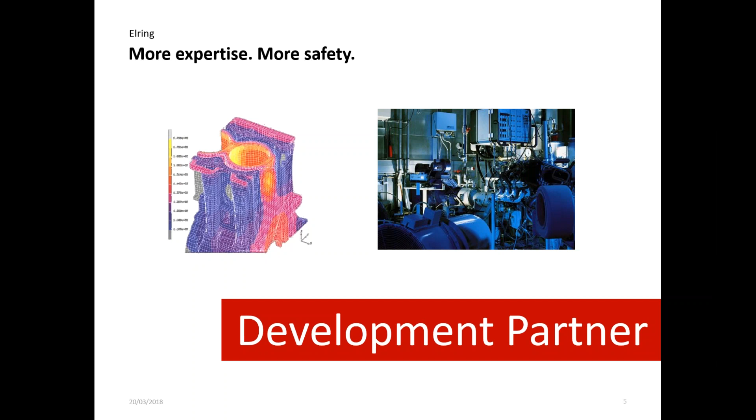Also the Elring gaskets - this is the thing you have to know - Elring is the aftermarket brand of ElringKlinger manufacturing. These Elring gaskets for the aftermarket are engineered and manufactured on the same machines, the same production lines. So this is well-tested quality for the aftermarket business to repair these engines.

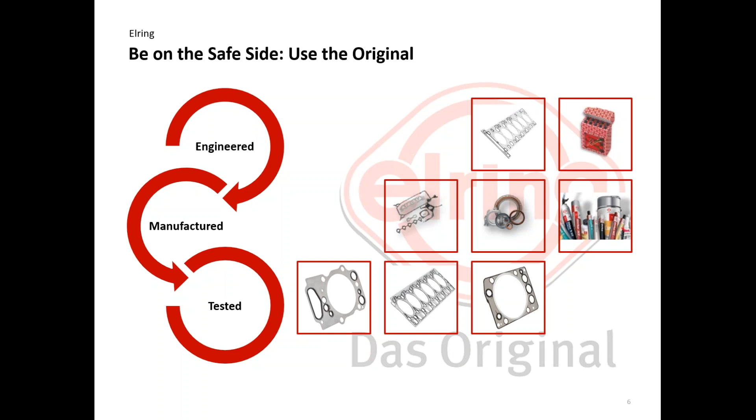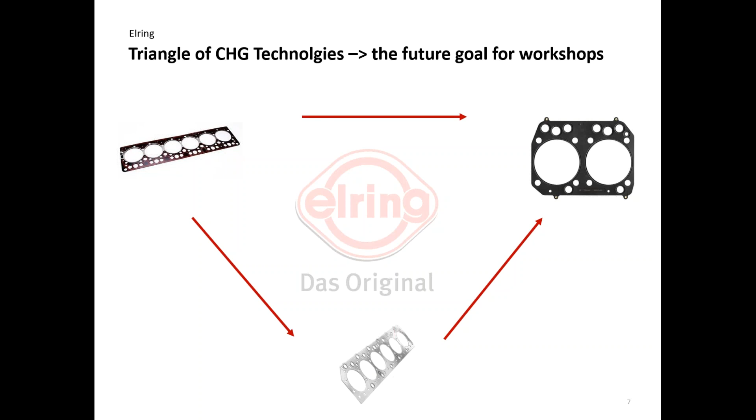These metal gaskets are flexible, no longer static like the old ones. I'll explain why later on. There we have two different technologies, two different ways of function, let's say. On one hand, we have multi-layer steel. On the other hand, we have metal elastomer, which is absolutely different in repairing and in handling. This you have to know. Why is it different? It depends on the surface quality.

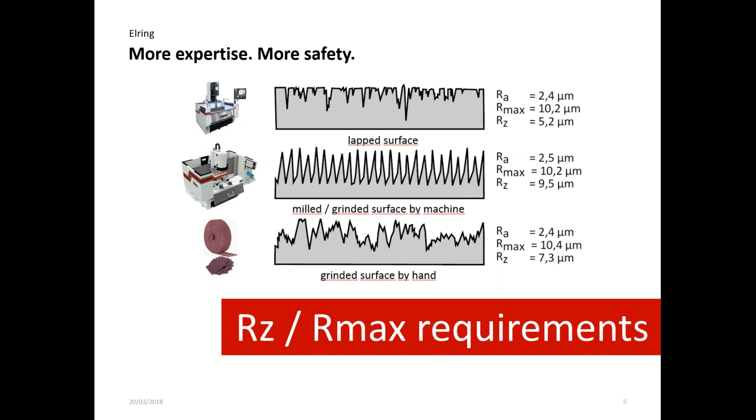Also the quality you have to go for is different from multi-layer steel gaskets to metal elastomer gaskets. This is important to have in mind, because for this you need a lot of experience, a lot of know-how on how to handle the machine, what is the machine speed, how much you can take away in one step. Not too easy to do, but finally you can do it if you have the know-how, and this know-how in terms of cylinder head gaskets, we provide to our customers.

Let's come back to the soft material gasket. This soft material gasket was roughly established in 1950, so this is really old stuff. From the production view, we do not use it any longer, but for the aftermarket, for the repairing, we still need these gaskets. So it's important to have the know-how, to be in contact and in touch with this gasket until today. But for the future business, it's maybe not so important to spend a lot of investigation work, a lot of time, on this old and vintage technology.

Nevertheless, this was a good part to repair, especially old engines, making cheap repairing possible, because of this full contact, full surface contact between crankcase, the opposite parts, cylinder head, and the gasket. So on any space, any area of this gasket material, the surface of the parts will find contact and will match to a proper function.

So this was easy to handle, but it was no longer possible to go any further with this technology because of the increase of high-end combustion pressure. In these times, 1950, we had no turbocharged engines, so the power output was roughly around 150 kilowatts, and the high-end combustion pressure was at 120 bars. Today we have nearly double in both parameters.

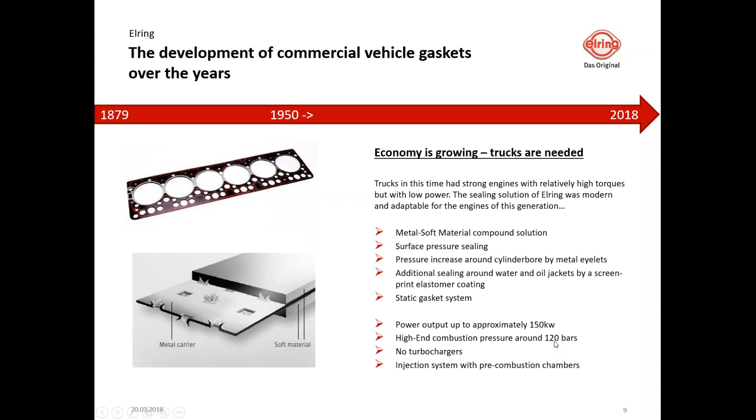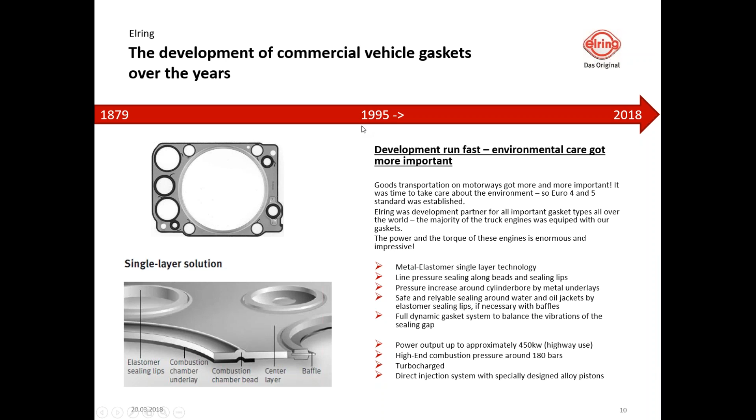But the development goes on and on. Today we have these new engines, also for trucks - doesn't matter whether medium-sized trucks with 4 or 6 cylinders, or these big, real heavy diesel engines. Today we have one cylinder head for these engines, with overhead camshafts, sometimes double overhead camshafts, 4 valves per cylinder, to fulfill today's environmental laws and have clean exhaust gases also on the truck side. For these engines we need a different technology of cylinder head gaskets.

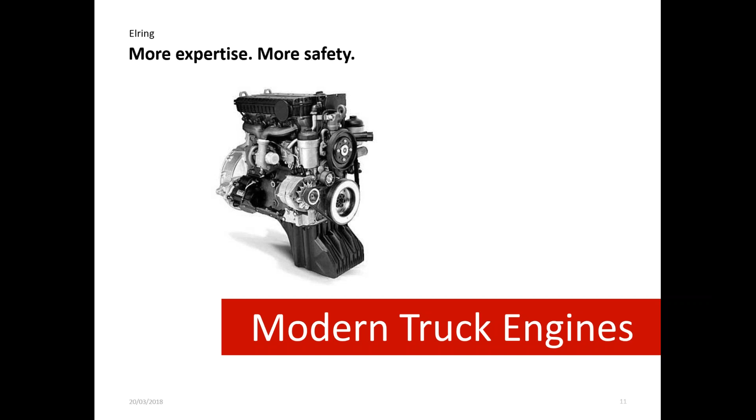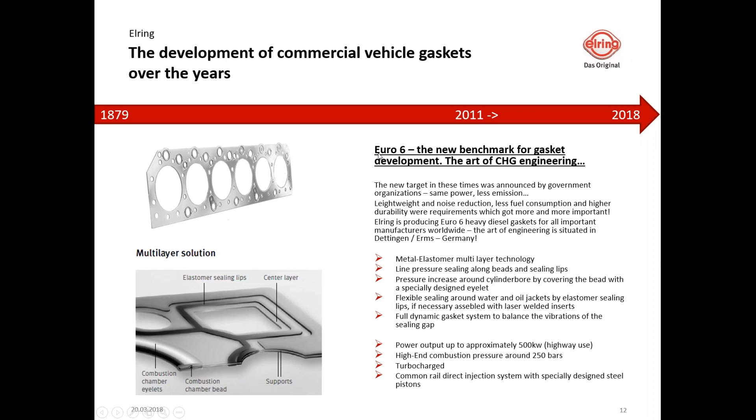These gaskets can be single cylinder gaskets, one gasket per cylinder, but mainly we have these one-part cylinder head gaskets in modern engines, and this can really be big stuff - engines with a gasket length of 1 meter is not very seldom. This is really high-tech engine and gasket technology of today, mainly to reach these high targets and challenges of today's environmental laws.

This is a technology aspect - we have a deep, detailed view to the inner part of the engine. Have a look from the cylinder head bolt, where to the combustion area is just a small distance, but from here to here it's an even bigger distance. That means the pressure is interrupted by this water jacket.

So it's absolutely clear, if we talk about the clamp force of the bolt, we have more clamp force in this area compared to that area where we have less clamp force. The same in the area of all 4 bolts. That means, or leads to the fact, that no cylinder is round.

We have a deformation in that form. Of course, this is a range of some thousandths of a millimeter, so it sounds like nothing, but at least this influences the tolerances between piston and cylinder. Doesn't matter whether you have cylinder bores or whether you have liners. The influence is different, but there is an influence on the ovality of the cylinder.

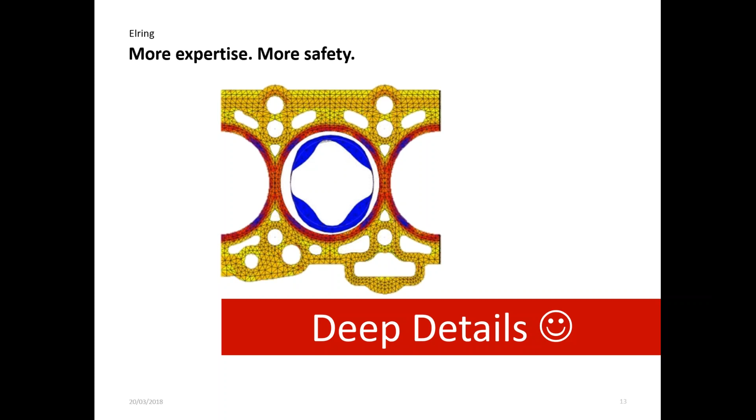See here, if we change from a 2-dimensional view to a 3-dimensional view, you can easily see the temperature in the cylinder and the pressure situation in the cylinder. Where it's blue, we have less pressure, but exactly in that area between the cylinders, we have more temperature. This is counterproductive. We need more pressure in that area.

So it's absolutely clear we have to give positive impact so we can influence this in a better way. And for this, some gaskets have so-called high topographic stoppers. Have a look on this.

If we coin in deformation, a stopper design with different heights, you see the thickness of this coined area in that part is thicker in comparison to that part. Here the thickness is less.

And it's absolutely clear for you as technical specialists, where we have less thickness, there is less pressure in the system. Where we have more thickness, we can increase the pressure in the system.

So that means if you develop a gasket together with the engineers of the engine manufacturer, you have this know-how, this experience and expertise to influence the gasket function, the engine function, in a very proper and clever way. And this is absolutely important.

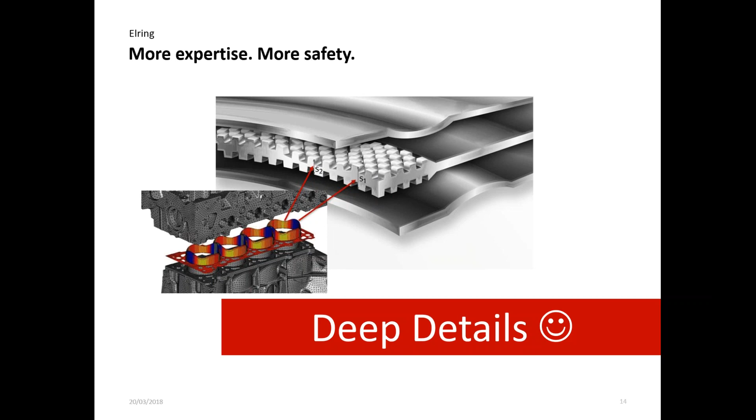And this makes the big difference between the OE conform gasket and a cheap gasket which is not OE conform. Of course, the other gasket might also work, but the durability is a big difference in that regard. So only the gasket with these details inside can work properly and make sure that the gasket has a long durability. These are real details of gasket engineering.

Have a look on these gaskets. Since 2011, the Euro 5 environmental care laws are established. We are now reaching Euro 6. I'm sure in the States, on the North American continent, there is something similar to reach these targets, these challenges. For these gaskets, for these engines, we need very special technologies of gaskets.

All of these gaskets are metal elastomer gaskets. You cannot fulfill the requirements with other technologies. The designs are sometimes different, but all in all, these gaskets are high-tech products.

So we do these gaskets, for example, for Paccar, for Detroit Diesel, Mack, and all the other European brands. We have special gaskets, so you can easily see on this Scania gasket, for example, there is a big difference. Around the combustion area, this Scania gasket is absolutely flat. So here the technical function is completely different.

The technical function is guaranteed by the shape of the cylinder liner. So it makes absolutely clear, if we have to go for the 100% perfect function of this gasket, the adjustment of cylinder liner to the crankcase and to the gasket, the clamp forces of the bolts has to be perfect, because all of these things have an immense influence on the sealing function of the gasket.

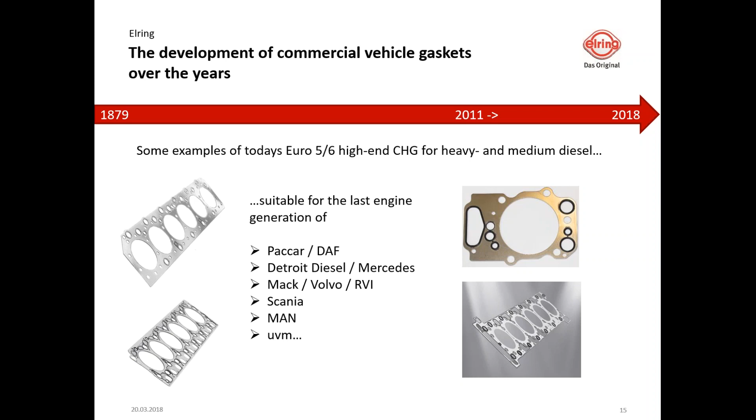A very special gasket design is this multi-layer steel gasket design. This is not so popular in truck use, but you can get a multi-layer steel gasket if you repair, for example, gensets. In the Engine Pro magazine of the AERA, I saw the Kohler genset on the front page.

And of course, if this Kohler genset might be driven by, I don't know, an engine which is fired by biogas, for example, it can be that the gasket is different from the highway use gasket, and it can be that this is a steel gasket in multi-layer steel design.

So normally you would say, okay, what is the big difference between the two steel types? Also here we have this bead for the contact to the opposite faces. Also here we have a stopper design. You see this coined design, which we can do in an equal thickness, and also in this high topographic design.

But the big difference is this black coating on top, because this coating is very sensitive in terms of surface quality. For this coating, for this surface of the steel gasket, you need a very perfect topography after machining. There's a big difference if you are working with a flying cutter or with a grinding machine. So you have to have in mind, you produce the surface quality, and the surface quality has to be adaptable to the gasket. This can be different from technology to technology.

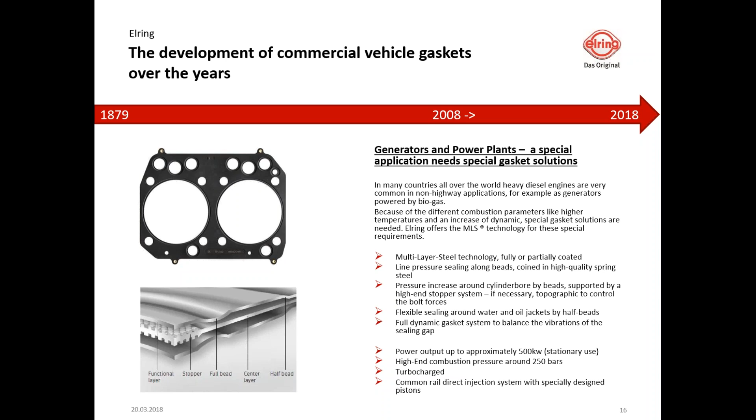Have in mind, this is not so easy to do, especially with this modern stuff since 2010, I would say, on average. What do we do to provide know-how to you?

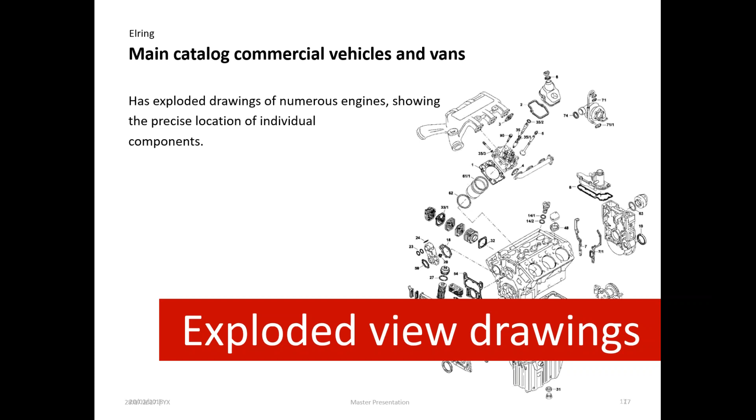On our website, you can find these exploded view drawings, so this makes it easy to see how the engine is built up, which parts we are offering, and to understand the engine function. This is helpful for identification of the parts and to speak of technologies.

Important know-how is also the tightening instruction. Normally with our gaskets you get these tightening instructions, but sometimes these documents got lost during the repairing, and this is very, very important stuff, because with the gasket we are talking about thousandths of millimeters with these stoppers, to influence the ovality of the cylinder. So it's absolutely important to follow the tightening instructions, because if you fail here, the negative influence on the sealing gap, the sealing function of the gasket, will be in the system, and you cannot avoid any failure in any way.

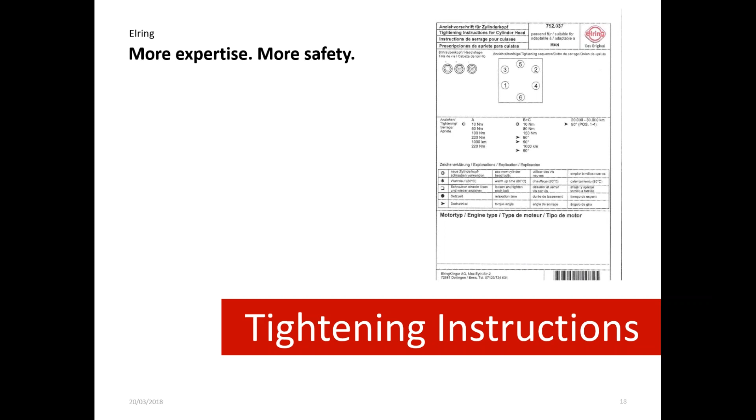This is important stuff which you can find on our website, for example technical bulletins. We heard from Rob that technical bulletins are very important in these times, and we also provide technical service information, TSI, for older engines, for example this Mercedes Actros engine, which has 3 different designs of cylinder head and 3 different gaskets which are not mixable. So you have to know which gasket, which cylinder head design you have, and we show how you can identify and go for the correct cylinder head gasket. Otherwise the gasket will fail if you use it with the wrong cylinder head.

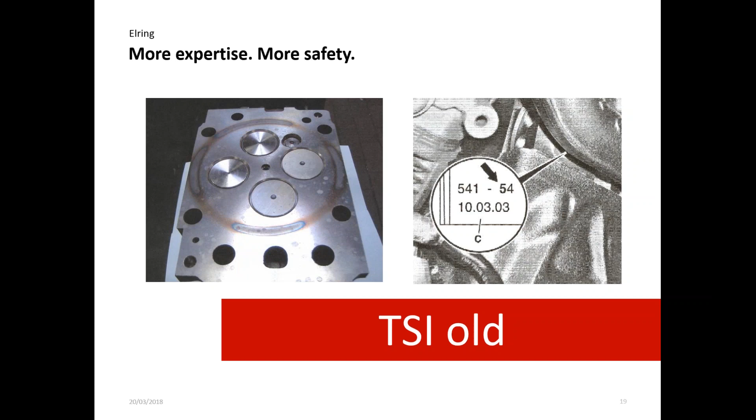This is old stuff. On the other hand, we have to have new stuff, and here we are in a win-win situation with our development partners. For example, with the Detroit Diesel 15, we have technical drawings which give us a lot of detailed background information of the engine. And of course, if we know there is something interesting for our customer, for our workshops, for our partners, then we prepare service information for the aftermarket, which we provide to our partners. This is very, very important to work on.

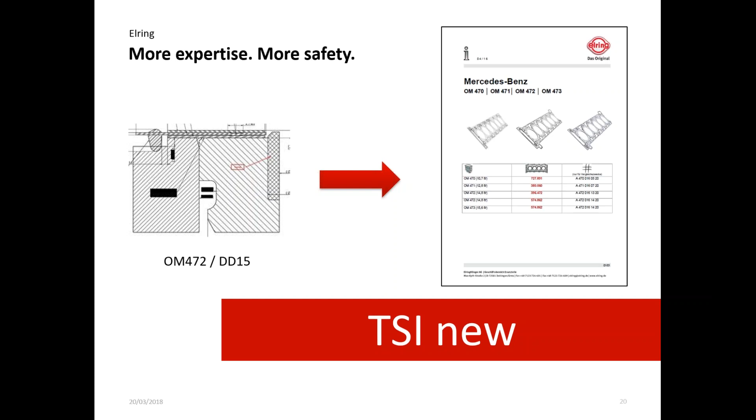My sample pictures here are Mercedes-Benz pictures, but of course we have pictures suitable also for the Detroit Diesel. This is the same engine, the so-called world engine, Detroit Diesel and Mercedes-Benz. So it's also very important for your market, for your country.

We do installation videos. Whenever we know there is something tricky in repairing an engine, we prepare a movie where we show how to handle the special tools, how to handle our gaskets, how to manage these challenges of today's engines. We show this mainly for passenger car engines, because by quantity this is the majority of our business. But of course, we also do these training movies, these installation videos, for the truck engines of today.

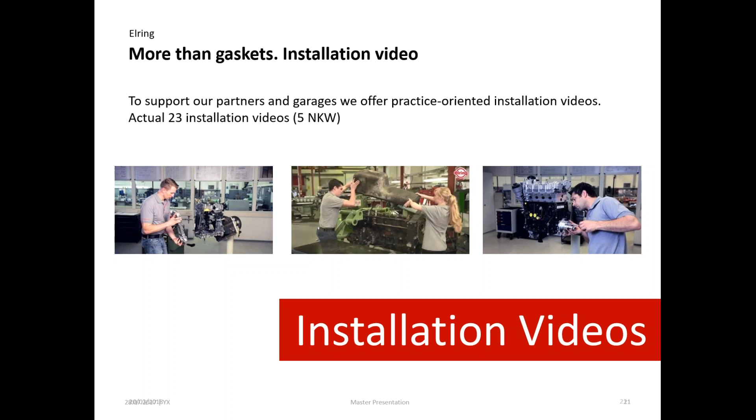Last not least, if you say there is something very interesting in this information and you want to learn more, we are also offering a training, an online training academy. You can find this via our website, our own website, where we provide know-how and where you can go for a certified expert status by passing exams, and also get certificates after passing these exams. Know-how is very, very important information in these times.